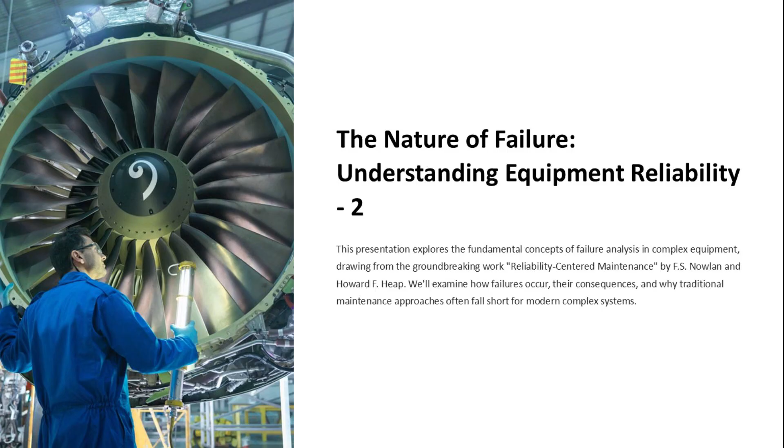In this presentation, we delve into the fundamental concepts of failure analysis in complex equipment, inspired by the groundbreaking work, Reliability-Centered Maintenance, by F.S. Nowlan and Howard F. Heap. We'll explore how failures occur, their consequences, and why traditional maintenance approaches often fall short for modern complex systems.

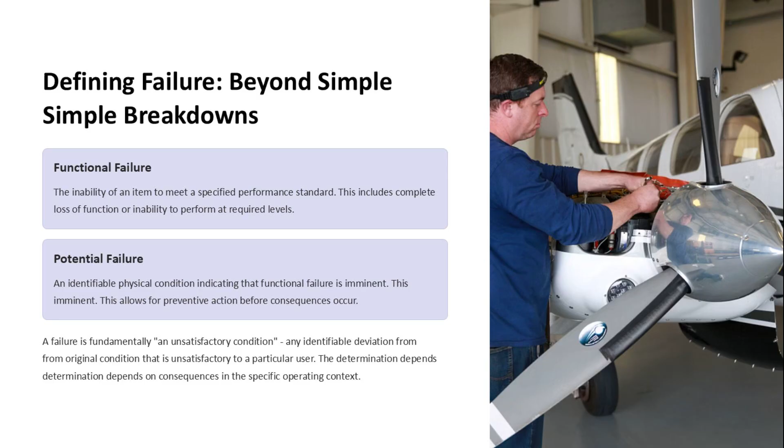Failure isn't just about breakdowns. Functional failure is the inability of an item to meet a specified performance standard, while potential failure is a physical condition indicating that functional failure is imminent. These failures are fundamentally unsatisfactory conditions that depend on the determination of their impact and consequences.

Detecting failures is a challenge, especially when they aren't evident during normal operations. Operating crews often miss hidden function failures that require special inspection. This highlights the importance of proactive monitoring and maintenance to catch failures before they escalate.

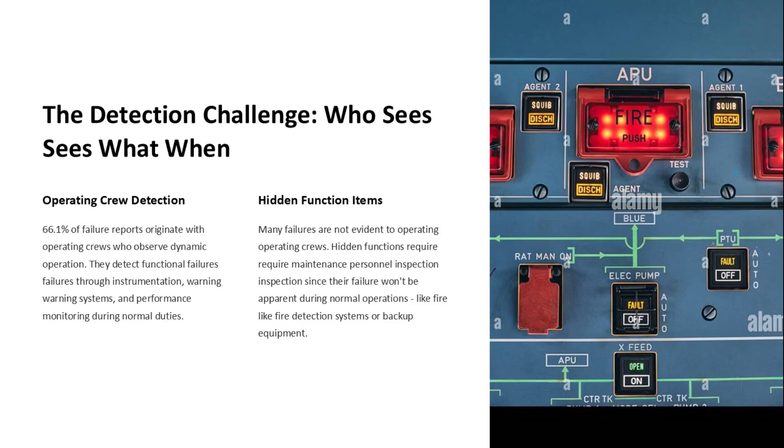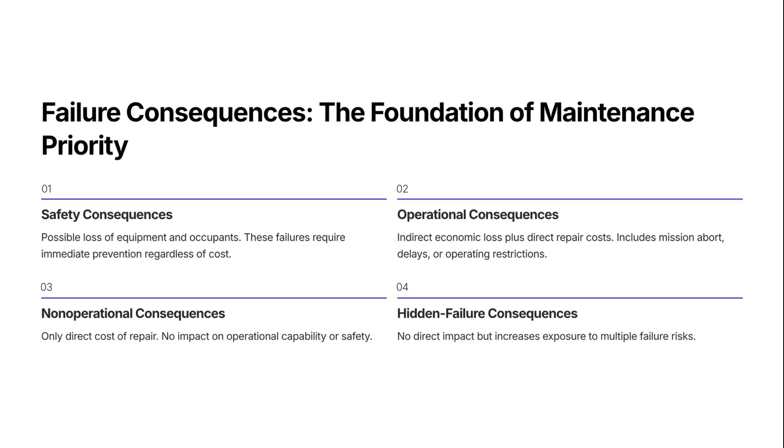Failure consequences are the foundation of maintenance priorities. Safety consequences demand immediate prevention, while operational and non-operational consequences vary in impact. Hidden failure consequences increase exposure to multiple failures, emphasizing the need for strategic maintenance planning to prevent hidden failure modes to surface.

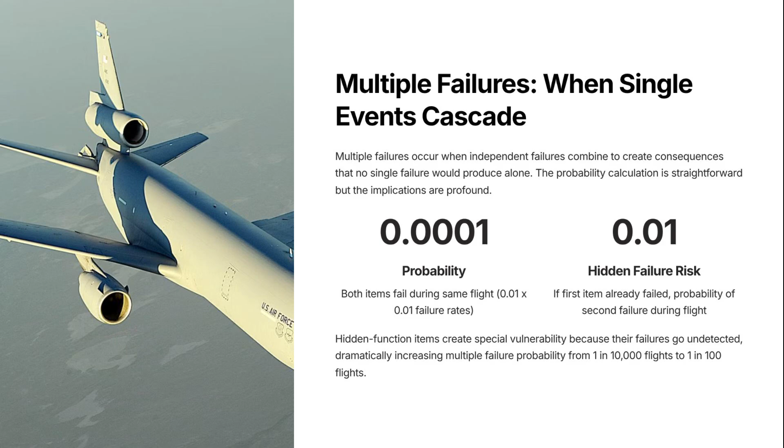Multiple failures occur when independent failures combine, creating consequences that no single failure would produce alone. The probability calculation is straightforward, but the implications are profound, especially with hidden function items that increase vulnerability dramatically.

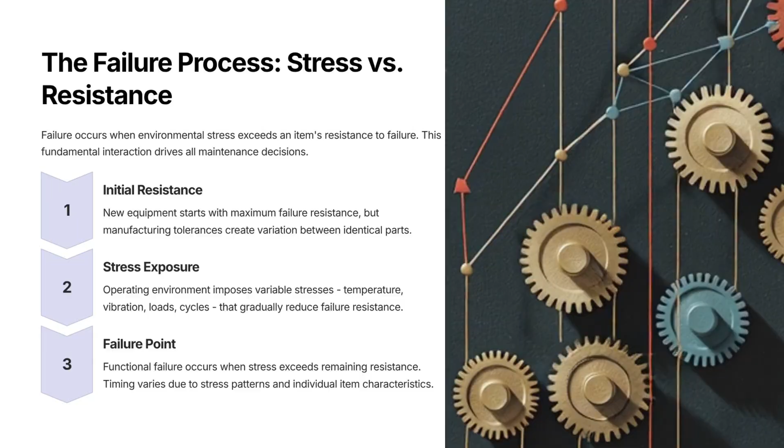Failures occur when environmental stress exceeds an item's resistance to failure. New equipment starts with maximum resistance, but stress exposure from operations gradually reduces this resistance, leading to failure. Understanding this interaction is crucial for effective maintenance decisions.

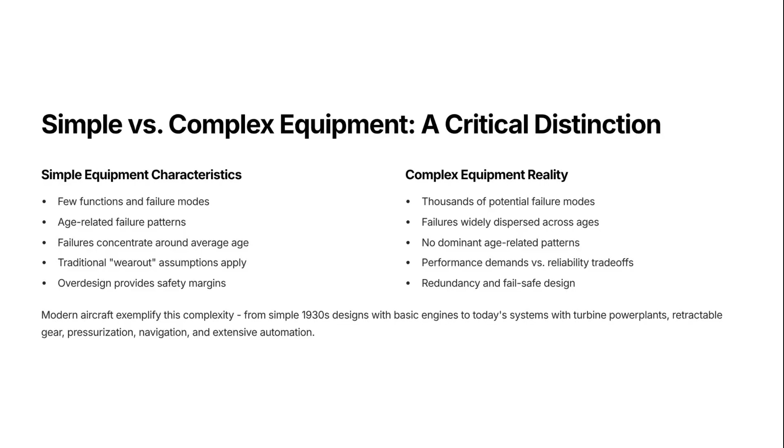Simple equipment has fewer functions and failure modes, often age-related, while complex equipment presents thousands of potential failure modes with diverse patterns. The reality of complex equipment demands redundancy and fail-safe designs to manage performance and reliability trade-offs.

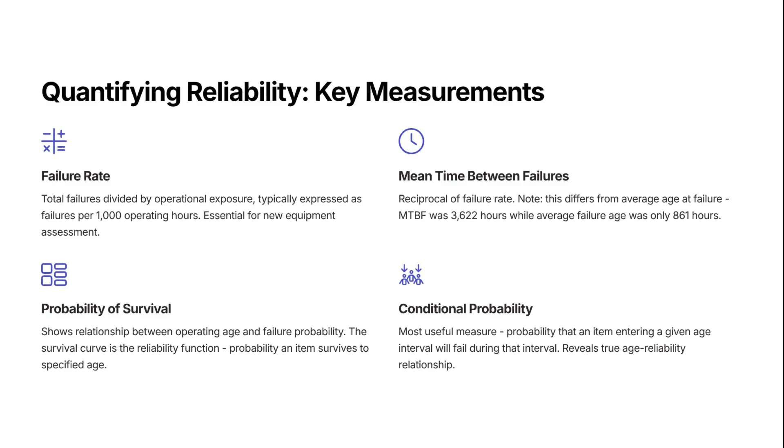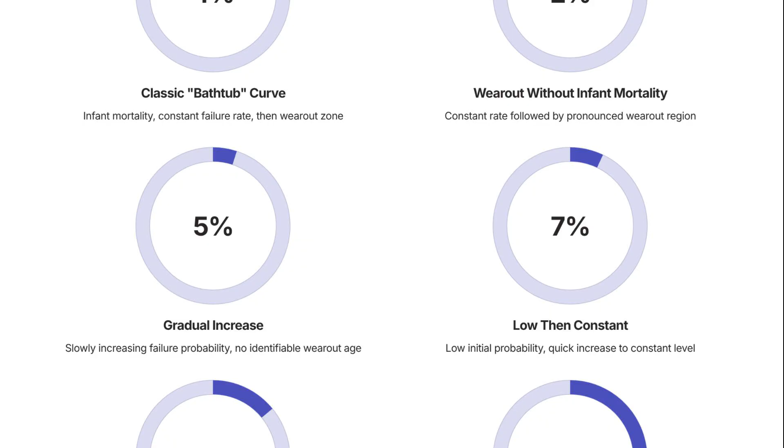Failure patterns vary, with some following a classic bathtub curve, while others show gradual increases or constant rates. Understanding these patterns helps in predicting equipment behavior and planning maintenance to mitigate risks and extend equipment life.

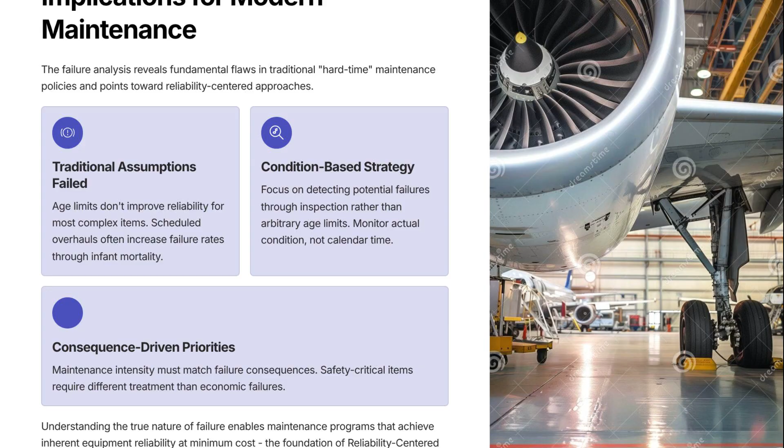The analysis reveals that traditional, hard-time maintenance policies often fail to improve reliability. Instead, consequence-driven priorities and monitoring actual conditions are essential for effective maintenance strategies, ensuring equipment reliability at a minimum cost.